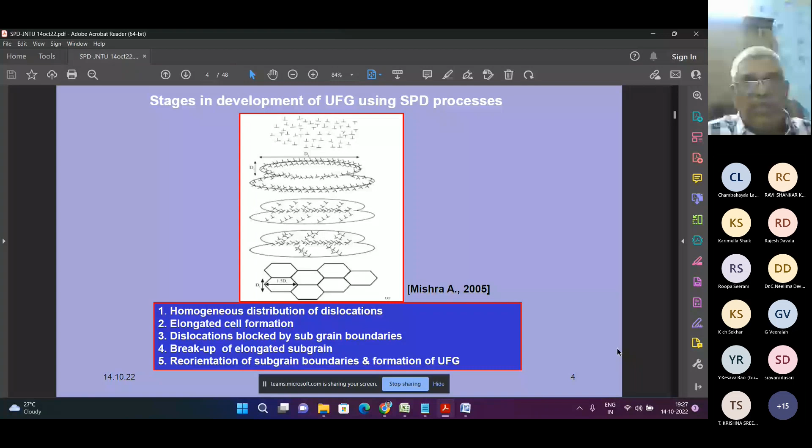Now you understand about ultrafine grain materials and how to make these ultrafine grains. What methods are available? There are two approaches: top-down and bottom-up. In top-down approach, you take a coarse columnar grain structure, roll it, forge it, or do severe plastic deformation to make nanostructured or ultrafine grain materials.

Bottom-up approach is using the powder metallurgy route or chemical vapor deposition route, where you consolidate fine particles to make an ultrafine grain structure and nanostructured materials. These are the two methods available to make ultrafine grain structures.

I think in colleges also you find a top-down approach: the director or principal takes some decision and gives it to the HODs, HODs pass it to the faculty, and faculty to the students, so that rules are made and changes happen in the system. Similarly, the bottom-up approach in colleges or institutes is where you get ideas from the bottom, that is faculty members or students, consolidate those ideas, and give them to the HOD, who passes it on to the director or principal. So that is called bottom approach. Whether top-down or bottom-up, that can be decided by you.

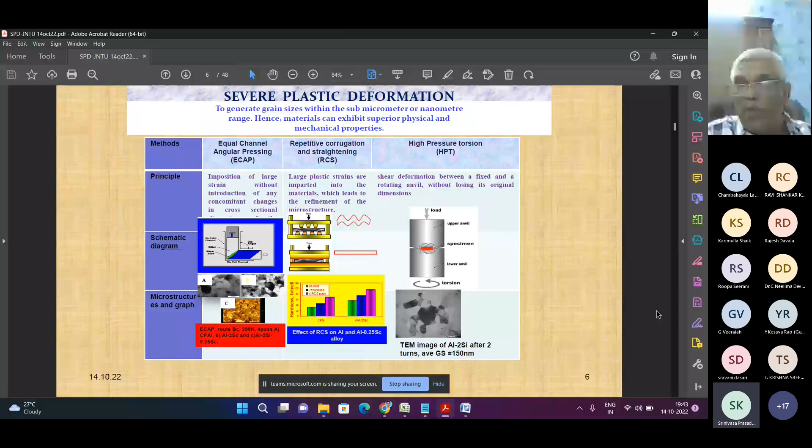So that performance will be better. What is the difference between a metallic material and a plastic material, you should know very carefully. The fracture in plastic or polymer materials like CFRP and GFRP is called catastrophic failure, meaning the failure happens suddenly without any introduction of a small crack beforehand. But in metallic materials, the crack initiates, propagates through transgranular or intergranular paths, and finally fracture takes place, which can take almost more than 6 months.

So we wanted systems like that. In aircraft systems, even though we can replace some of the material with CFRP or GFRP, metallic materials you are going to have without any hesitation. We wanted to say that you have to use metallic materials for aerospace application. Now their skin material has been replaced with CFRP. Even though a lot of research work is being carried out, metallic material research is compulsory and it is being done.

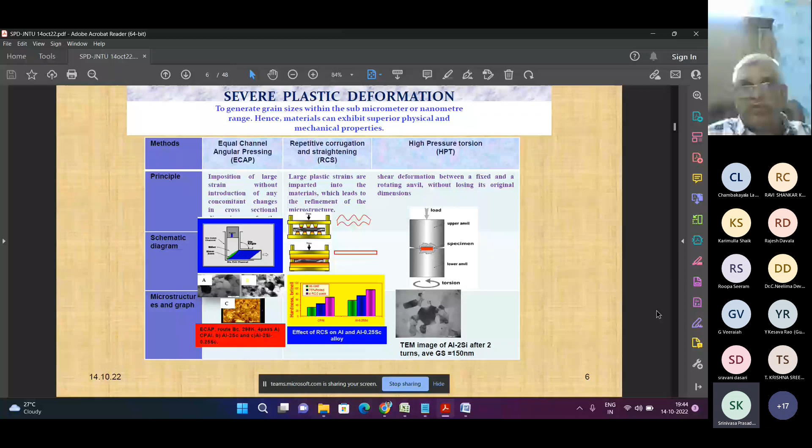Whenever we do any process, let us see what is happening. I won't explain the structural changes or how the process is made through animation; I'll directly show the work we have done. For example, we have taken aluminum-silicon alloy and subjected it to ECAP, equal channel angular pressing.

Now you can see the optical photomicrograph showing the as-cast alloy with a beautiful grain size. You have the micron bar and can easily get the grain size, and you can see how the silicon particles are distributed.

When we did this by the ECAP process, you can see an AFM image after 4 passes at room temperature. The grain size has been drastically reduced, becoming ultra-fine. The silicon particles have also broken down, as seen in the center part. There is a drastic difference between the initial stage and after one, two, three, and four passes.

Each pass, we go on changing the direction of the sample, and you get different shapes and sizes of silicon particles. This bar chart shows the reduction in silicon particle size due to the ECAP process.

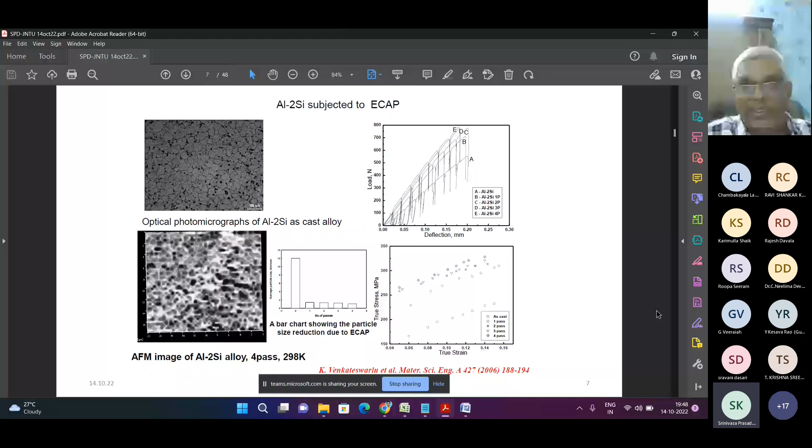Now here you can see the ECAP process we have done. Most people after PhD, when wanting to go for higher studies like a postdoc position, when I went to University of Southern California, I had taken a lot of samples. This is because I know ECAP work well, and I am involved only in severe plastic deformation work.

From NML Jamshedpur we had a lot of facility for manufacturing samples, so we made all 10 diameter by 100 samples with very good surface finish, like CPAL, commercial pure aluminum. Most people must know about these aluminum alloys: 1000 series to 9000 series are available. The 1000 series is pure aluminum.

2000 series, 3000 series, 4000 series, 5000, 6000, 7000, 8000, 9000 series. What is happening is you add some alloying elements to increase the strength of the material and ductility. The ductility may reduce, but initially you want to improve the strength.

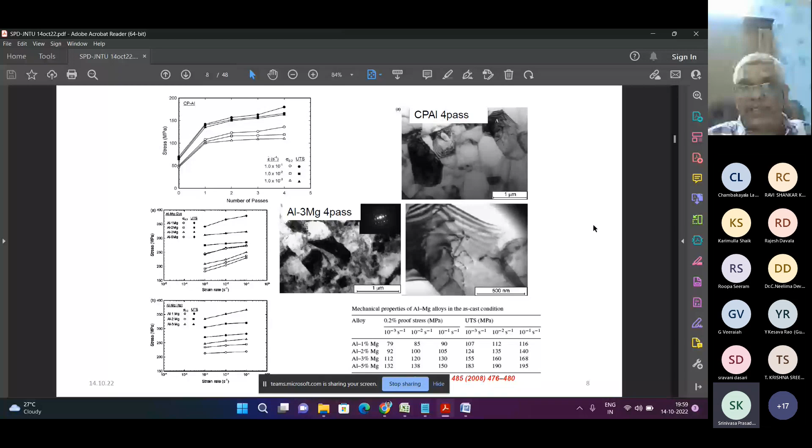This has also been published, and I have given the reference of the publication. Next slide, please. Yes, I changed it.

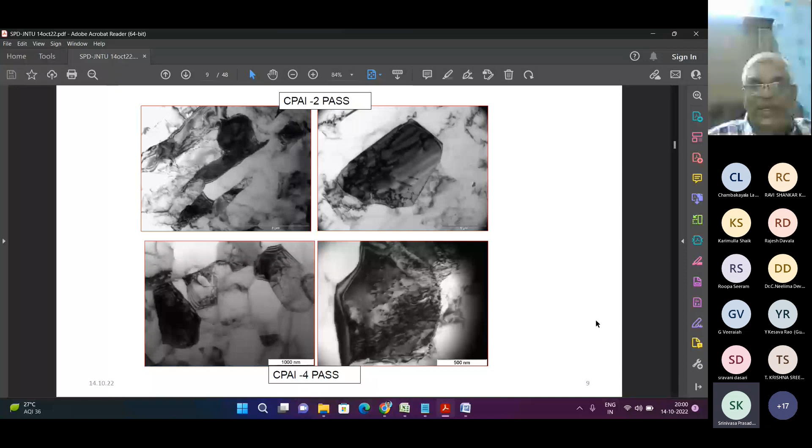This is the work we have done for TEM, and all of this work has been published.

What we have done is we tried adding scandium content. As we have seen, aluminum 2 scandium master alloy is available, where 0.25% scandium is sufficient when adding. That means for any alloy, whether aluminum-magnesium-silicon or aluminum-zinc-magnesium, 0.25% scandium is sufficient. But aluminum scandium is available only in the master alloy form of aluminum 2 scandium.

So that sample itself we have taken and tried the ECAP process, and after 4 passes we can see that the grain size is drastically reduced. At higher magnification, the grain size is still further reduced, almost to 200 nanometers. So this has drastically reduced the grain size.

Similarly, we have done this with aluminum 3 magnesium alloy after 4 passes. Generally, after 4 passes, if you go on doing a 5th or 6th pass, there is no use. In one Australian paper, they continuously did 8 passes and found that after 4 passes there is no much difference. So everybody restricts to 4 passes only.

When doing grain refinement studies, according to the Hall-Petch equation, grain size reduction influences the yield strength—the yield strength enhances as grain size reduces. Can we go on reducing the grain size like that?

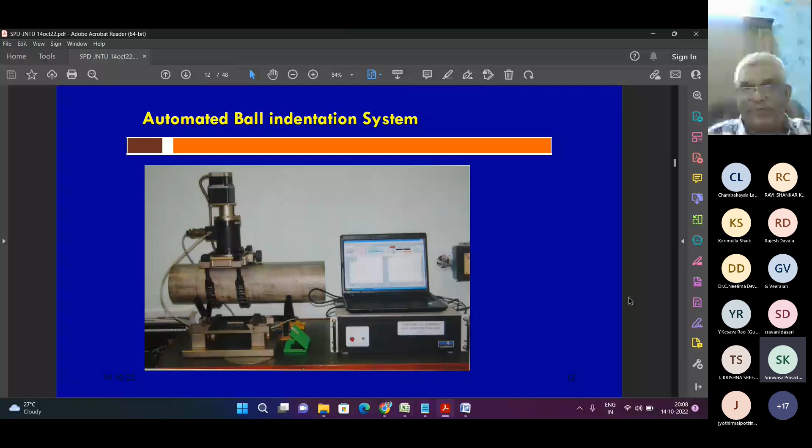Next slide, please. Yes. I don't know how many people are interested in aluminum alloys.

Before going into high pressure torsion in detail, let me explain the material requirements for CSIR NAL till 2025. Last year we went to Delhi with all aluminum manufacturers in India like Balco, Nalco, Hindalco, Malco, HAL, NAL, ISRO - everyone presented. I am happy to inform that I went for this meeting from NAL and presented. The requirement I will show is very small compared to the requirements of ISRO and other space organizations in terms of aluminum consumption, very small compared to our laboratory needs.

I'll quickly go through these slides on the material requirements for CSIR NAL. I request Dr. Prasad to go a little fast. Yes sir, this shows the material requirements for CSIR NAL, particularly on aluminum alloys.

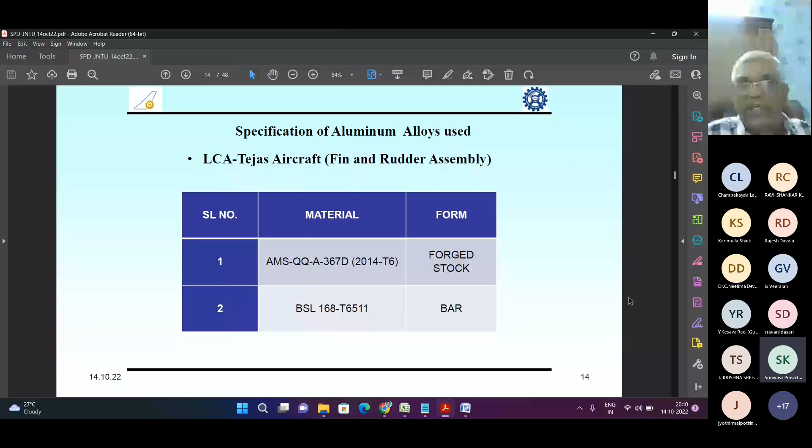Next one, yes, so this is LCA Tejas aircraft and what aluminum alloys are required. For civil aircraft systems like the Saras aircraft and RTA regional transport aircraft, what materials should we use?

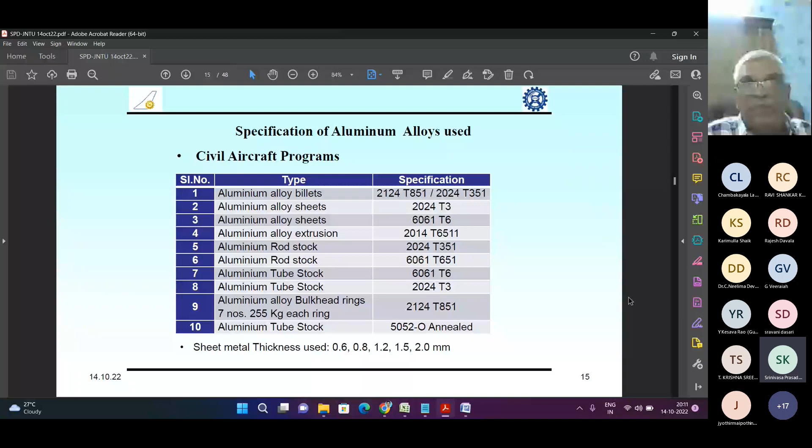2124, 2024, 6061 - you can see the T6 condition is being used on 6061. What heat treatment cycle have they given? All materials, whether in sheet form, extrusion form, rod or stock form, are given. Sheet metal thicknesses used are 0.6, 0.8, 1.2, 1.5, and 2 mm. Most people would have a record that the sheets generally used are 1.6 mm for all aluminum alloys.

This is for Tejas aircraft. What quantity is required? We have written how much is required per set - 96 kgs required, and for bars and forged stock, the requirement is also given. The total material requirement is 6.25 tons for this purpose.

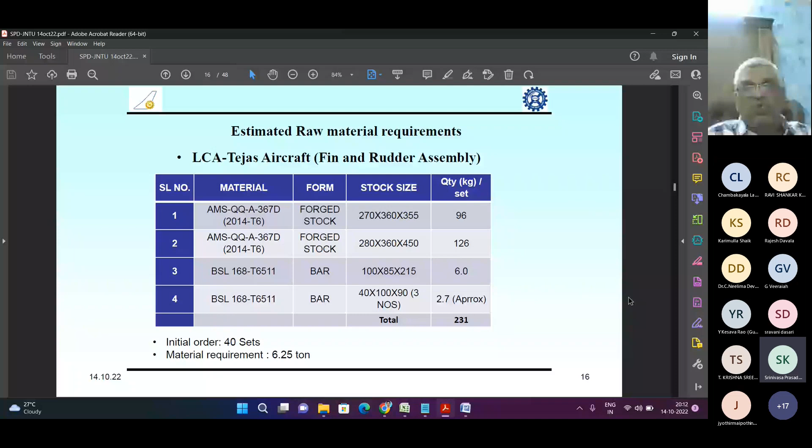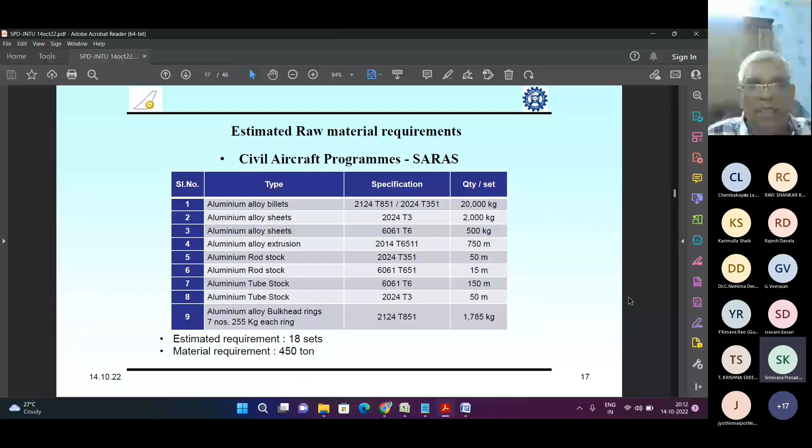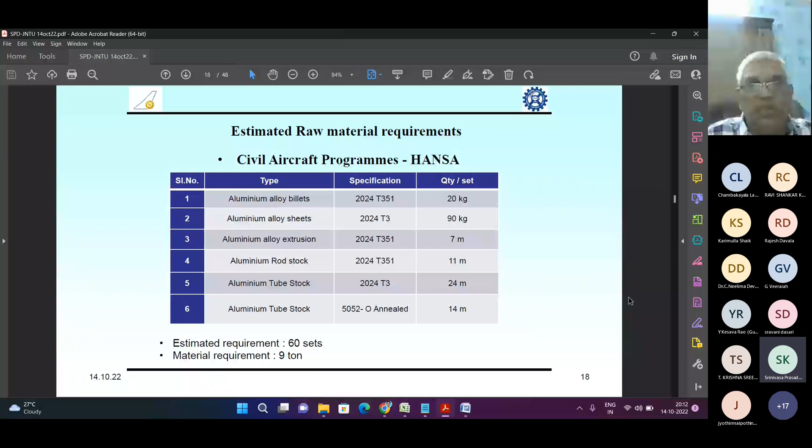For this material, about 1,785 kg material is required if you wanted to make it. Total material required till 2025 is estimated around 450 tons. The quantity we are showing here, you should not feel happy about it - for civil aircraft programs like Hansa, a new generation where aluminum quantity is getting reduced, the requirement is almost 9 tons only, including billets, sheets, and extruded products.

Then there's the CSIR-National Aerospace Laboratories with Mahindra - a 5-seater aircraft we developed, where the billet, sheets and extrusions requirement for 2025 is almost 1.1 tons only. For the RTA regional transport aircraft, a 70-seater aircraft, the material requirement is 180 tons.

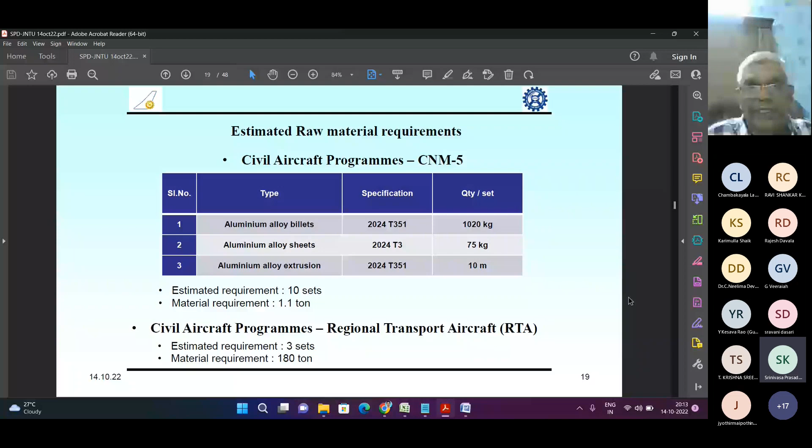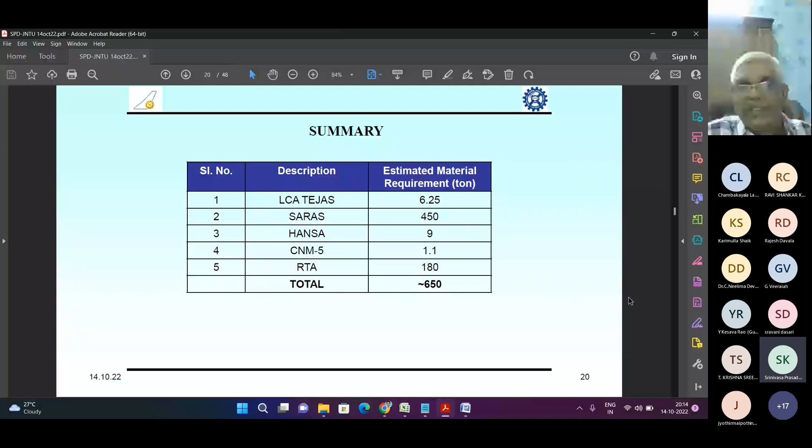Light combat aircraft is made by HAL, and we have a lot of contribution in this. This is the indigenously developed aircraft system. Nowadays, if you watch television, almost all fighter aircraft shown are Tejas. The government has given an order for making 70 such aircraft.

A break here. Sir, okay sir, we'll come back after 10 minutes on high pressure torsion on aluminum silicon and aluminum silicon scandium alloys. Sure, I think we'll stop here. Can you ask them to come after 10 minutes? Yes sir, I request all participants to come back after 10 minutes so the part 2 session will be continued by our experts, sir. Okay, thank you very much. Thank you, sir.

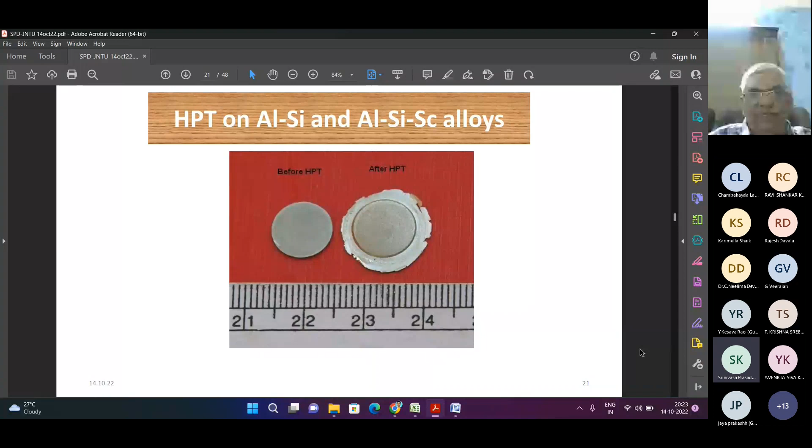Understanding this, using the HPT method you can achieve a yield strength of around 1000 MPa. Aluminum alloys, if you are getting around 350-400 MPa after heat treatment or after ECAP, that itself is great news. But getting 1000 MPa is really great news, and we got these results repeatedly.

We thought we'll present this to one of the sponsoring agencies like ARDB, because we belong to aeronautics structures, aeronautic boards. So we applied, and we showed very nicely that by using this HPT process, whatever material - aluminum silicon, aluminum magnesium, or aluminum silicon scandium alloy - we can achieve mechanical properties of 1000 MPa yield strength.

But the question asked was, when the sample is only 10 diameter and 1 thickness, where are you going to use it in aerospace? So my humble request to all faculty members is, whenever you apply for a research project, please see what the sponsoring agency is looking for. It is not about what expertise you have. We have good experience on high pressure torsion, and even though we have a lot of interesting results, when we presented this, they rejected our proposal.

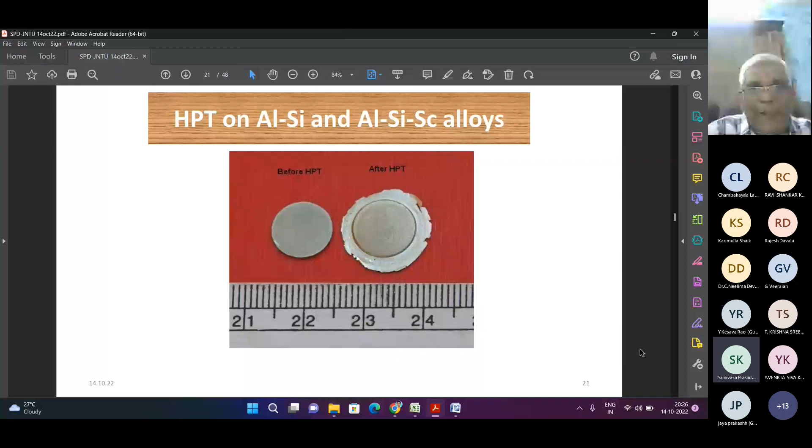Next slide, Dr. Prasad. Yes. Next slide - that is after high pressure torsion. I think this is the video, I don't know whether it can work or not. I don't know whether it is in PDF mode, it will not work. Not working, sir. It will not work, I think I cannot show, but this is the controlling panel where we are having - this is already industry, earlier one. Can you go to earlier one?

Yes sir, HPT image - you can see here that the control panel is there, where you can move the upper anvil movement, lower anvil, and make the rotation. This is a beautiful compact model we have used, based on our design. One agency manufactured this, and it is working very nicely. It is kept in Basaveswara Engineering College. Recently I had been to that place.

Why? Because whatever we have done in London, we compared the same material used here, and the results are almost coming the same. So whatever machine we have developed is extremely useful, and you can apply pressures up to 5 GPa. Only thing, the size of the sample is very, very small.

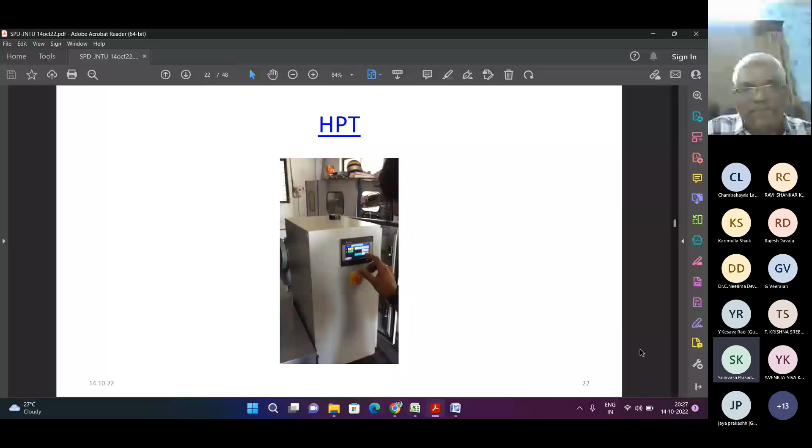So when you are doing high pressure torsion on aluminum 2 silicon 0.25 scandium alloy, in as-cast condition, you can see that the grain size is almost as in the cast condition - I am talking not the processed condition, it is as cast. It is showing around 25 to 30 microns average grain size, where due to scandium additions, refinement has also taken place. This is the actual result.

When you see this aluminum 2 silicon alloy, this is without scandium additions. With this, you can see that on the right side by using the ball indentation technique, or we have taken directly the specimen and evaluated the Vickers hardness.

I think not many people know about micro hardness. When you are talking about micro hardness, it is based on HV 0.5 or 0.2, and that subscript should be used to indicate what load you have used. What we have shown here, HV alone is not correct - it should specifically mention HV 0.5 or 0.2.

Nowadays, I am reviewing a lot of papers for international journals, and we find these types of mistakes are there. We ask the authors to rectify those things.

So what we have done is pressure torsion on both the negative and positive sides, and evaluated the mechanical properties on both sides. We did the Vickers micro hardness test with different turns - quarter turn, half turn, three-quarter turn, one turn, and five turns. As I said earlier, after 5 turns there is no further change. If you see carefully, 1 turn and 5 turns give almost the same properties, around 75 to 76 hardness values, and in the center it will be less.

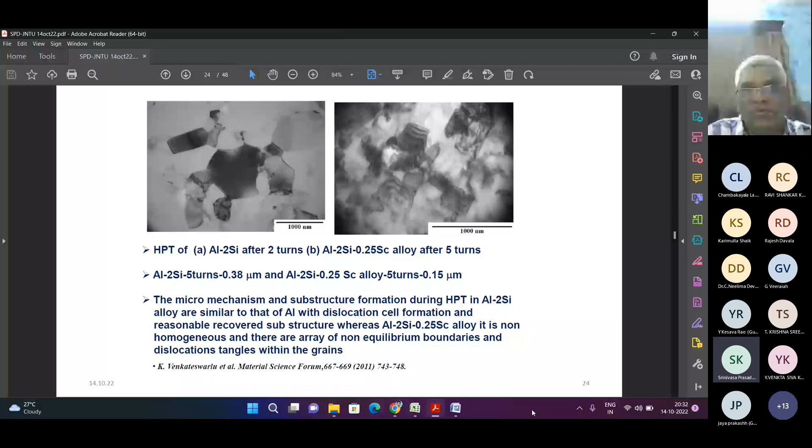Next slide. Whatever images we are showing, whatever work we have done, please try to understand that for most of these...

One minute, okay sir. Namaskar ji. Can I give a call after 9 o'clock? I'm in a lecture, okay.

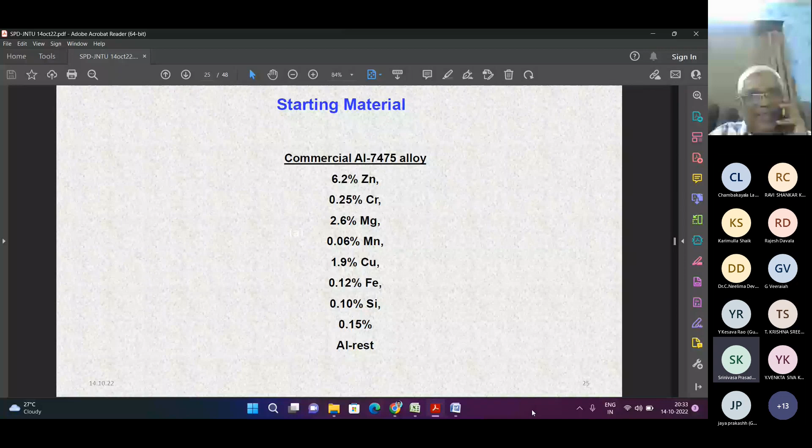So, for aerospace applications, as I mentioned earlier, there are different aluminum alloys. Here you can see 7475 alloy, the commercial aluminum-zinc-magnesium alloy used for aerospace application, with 6.2% zinc and 2.6% magnesium content.

This is the 7 series of zinc-magnesium, 0.4% means... 7475 alloy is the high strength aluminum. If you talk about the 1000 to 8000 series, the highest strength is obtained with aluminum-zinc-magnesium alloy only. Since it contains some zinc, there is some corrosion problem, but this material is still extensively used.

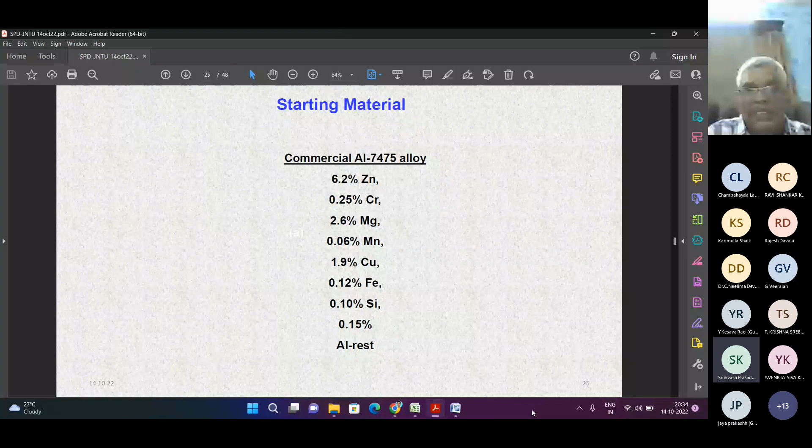Since it has some limitations, only certain applications use aluminum 7475 alloy, not everywhere. We took 7475, a high strength aluminum alloy, to understand how it compares to other alloys. If you homogenize this alloy and perform high pressure torsion, what strength properties can be improved? We studied this commercial aluminum 7475 alloy processed with high pressure torsion, and I will present the mechanical properties after HPT.

This is 7475 alloy, processed with different turns: half turn, 3/4 turn, and 2 turns. You can see four graphs, and the bottom graph is from the micro hardness tester using Vickers micro hardness, coming around 160 HV, that is Vickers hardness.

Hardness is our resistance to indentation, and all hardness values have units. For simplicity they are expressed as HV, HB, RC or RB, but the units are Newton per mm square. The Vickers hardness number VHN equals 1.854 times P by d square, where p is the load and d square is the diagonal length, d1 into d2. P by D square is Newton per mm square, that is megapascal or gigapascal. So every hardness value has units of MPa or GPa, but for simplicity we call it 210 HV, which shows the load by area.

When processed with different turns, the hardness changes from 160 to 220 HV. There is a drastic difference between center and edge. The average micro hardness versus distance from the center of aluminum 7475 processed by 2 turns is presented here, showing a drastic difference in micro hardness values.

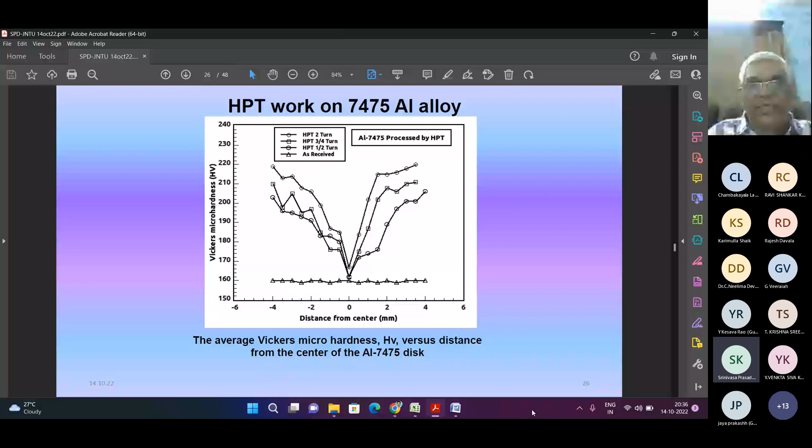We achieved more than 1000 MPa yield strength for this material, which you can never imagine getting in aluminum alloys. 1050 MPa yield strength is very, very high—even steels may not reach that much strength.

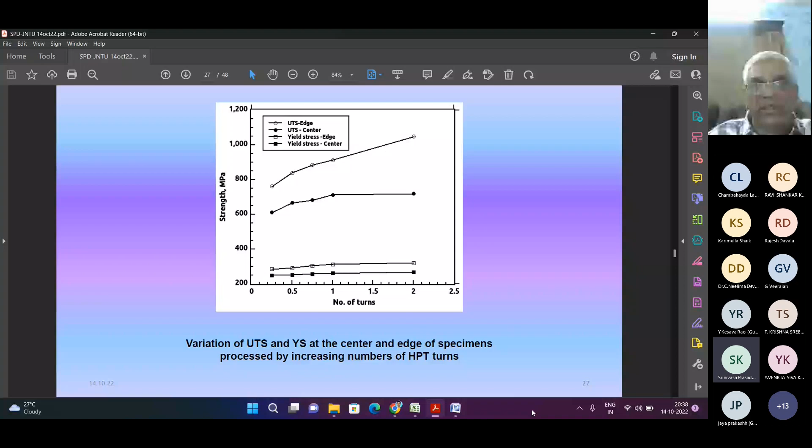This was published in the Journal of Materials Science, because one of my PhD students, Deepak Patil, who is now working as a faculty associate professor at KLE, did this work, and I am presenting all his work here.

In fact, I am the guide, and Professor Kori, who is the Vice Chancellor now in Open University, Central University in Anantapur, he is the co-guide for Dr. Deepak Patil. And we have published this work not only in the Journal of Material Science, we have published in some conferences also, abroad conferences.

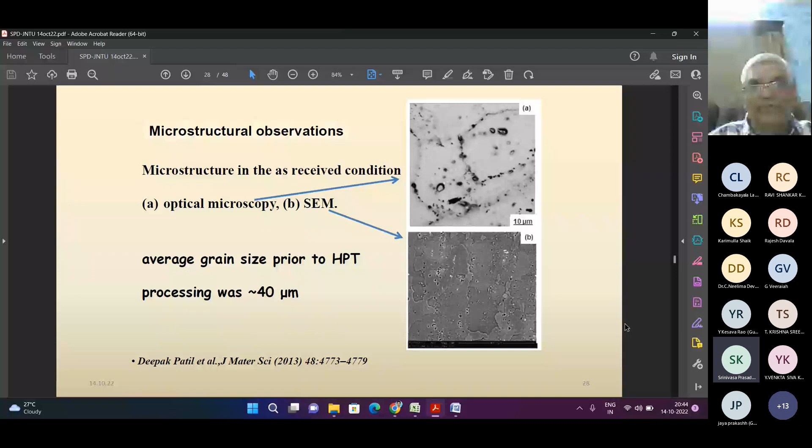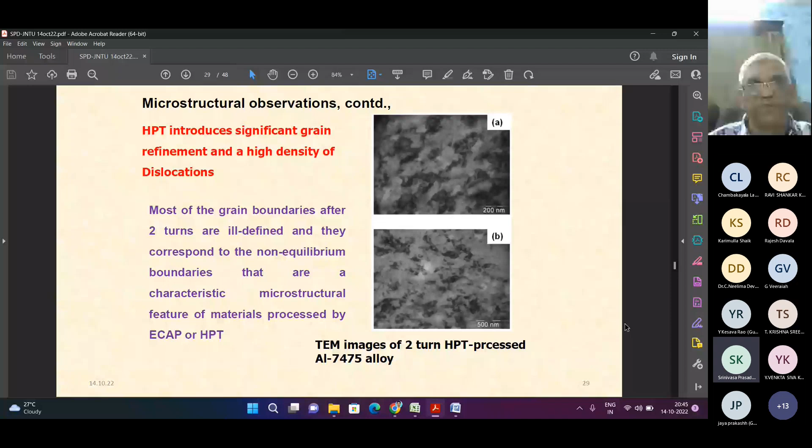What we'll do is go through the observations we have made on high pressure torsion on 7475. I wanted to give you some of the conclusions, or I will not call them conclusions, because a lot of work can still be done on this. Some of the observations we have made on high pressure torsion of aluminum 7475 is that the hardness value increases, as in the center of the sample it is very less.

At the edge of the samples or discs, the hardness is high. Why? Because you are taking only a 10 mm disc, the values remain low in the central region, and at the edges it is high. The absence of hardness homogeneity is due to the limited extent of HPT processing through a maximum of 2 turns. We have done only 2 turns here, and we wanted to see how HPT is useful for enhancing strength; we have reached 1050 MPa.

Processing by HPT through 2 turns reduces the grain size at the edge of the disc from an initial value of 40 microns. As we have seen in earlier images also, whether you take optical microscope or SEM images, in the as-received material it is almost 40 microns. After HPT of 2 turns, the average grain size has come down to 70 nanometers.

Not only do we get such a low grain size of 70 nanometers, we have also obtained an ultimate tensile strength of 1050 MPa at the edge after 2 turns. This is the work we have done on high pressure torsion of 7475.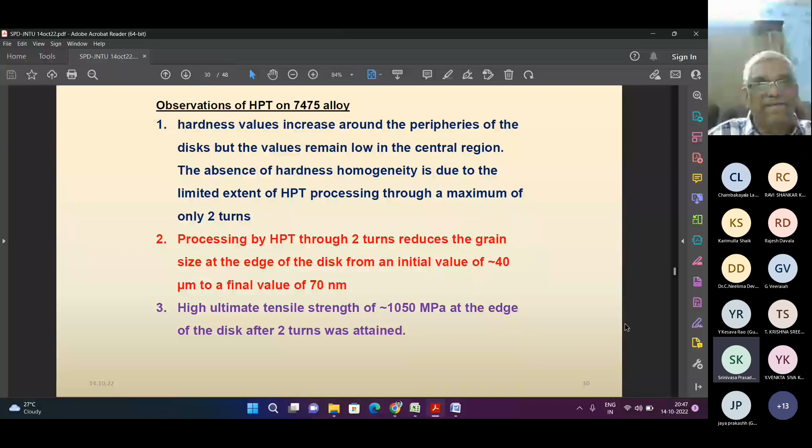I'll show you some remaining slides on high pressure torsion on aluminum 2024 alloy. Why did we choose 2024 alloy? For any aerospace application, particularly we are working on the Saras aircraft system, where the skin material and most of the stringers and engineering parts of aluminum alloy are made with aluminum 2024 alloy only. This is the aluminum-copper system, 4.5% copper, known as duralumin.

We are using 2024 or 2014 alloy extensively for our Saras applications, and we studied how high pressure torsion influences this alloy. If anybody wants 2024 alloy, they can approach us; we can send you this material free of cost. We have extensive sheet form and billets available, and we are doing extensive work on 2024 and 2014 alloy.

If you see the SEM images of this material at low and high magnification, you can see beautiful grain boundaries where Al2Cu is precipitated along the grain boundaries. Beautiful SEM images have come out in the as-received condition.

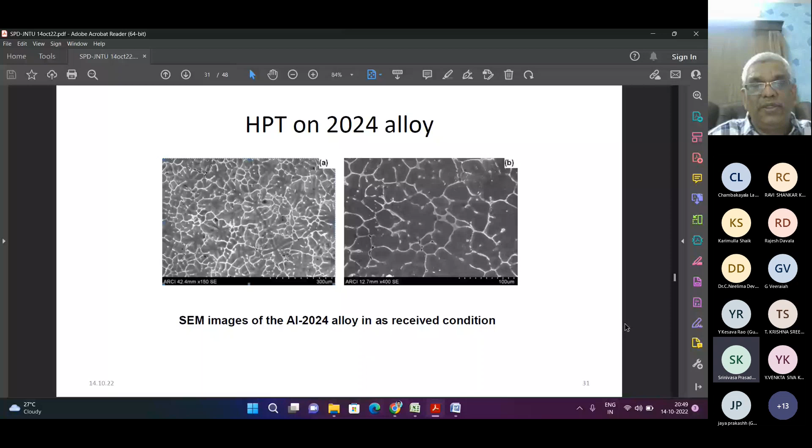Before understanding anything, you are supposed to see how grain size reduction is taking place. Similarly, this Al 2024 alloy, duralumin alloy, extensively used for aerospace application, we have used automated ball indentation, comparing center and edge for all tonnages from quarter turn to 5 turns. This is the research work we have done; you can see how YS and UTS have changed.

The UTS goes up to 1160 MPa with an n value of 0.09. As the n value increases, the values of YS decrease. At the edges, you can get a UTS of 1160 MPa. These are tremendously good results, which we have also published.

I have already explained how automated ball indentation is done for these high pressure torsion samples when the sample size is very small, and how you can do the ABI and obtain this information.

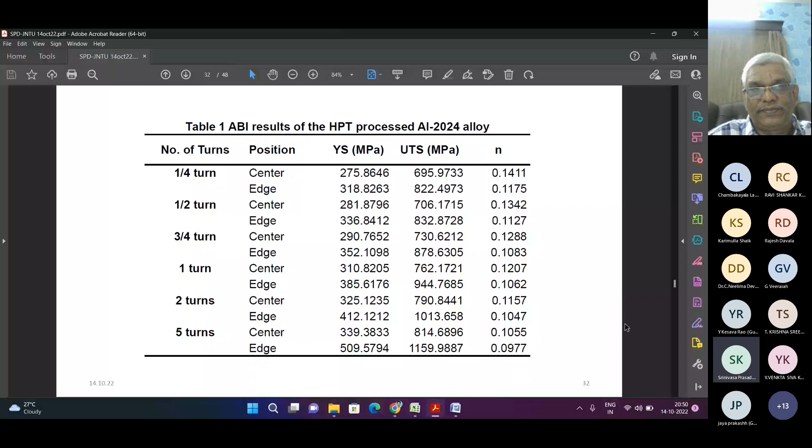That is a mechanical engineering design aspect when you are studying. You should be proud that the London Eye is developed by mechanical engineers, where you have a giant wheel, you can see the whole city of London. Till date there was no accident, and people are very happy. Why? Because the factor of safety, whatever is measured, is 1.5. For aerospace application we take more than 1.5, that is 100 MPa required, you take 175 or 200 MPa, that is a factor of safety of two for aerospace application.

If it is engineering application, 1.25 to 1.5 is the factor of safety we consider. For aerospace application in general, the factor of safety should be higher. Whenever you are designing any aircraft, the main requirement is safety of the passenger, that is most important. Then it should be economically viable, the rate should be very less, and you should have a comfortable journey. We have almost 20 divisions in our laboratory, everybody working on different aircrafts, Saras or Hansa or NM5, and we are mainly looking after the material properties only.

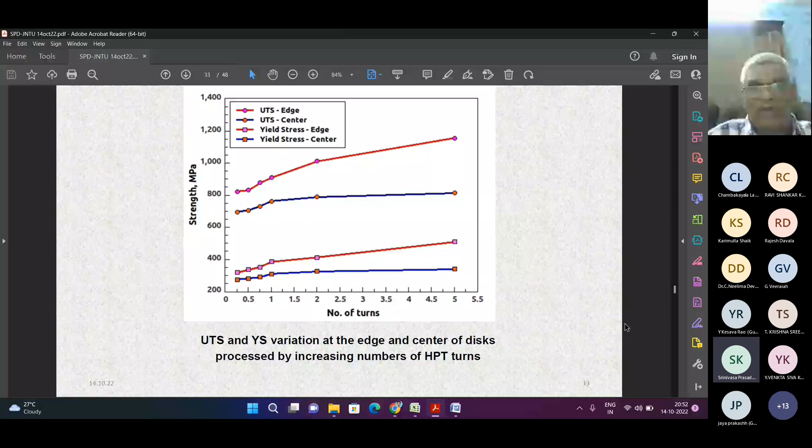After understanding this one, we are taking the TEM images of aluminum 2024 only, and you can see the dislocation type pile up on the left side image. This is after 5 turns of HPT, high pressure torsion, of the same aluminum 2024 alloy, where we got the ultimate tensile strength of 1160 MPa after 5 turns. SADP pattern also we have taken, and you can see how the atoms are arranged. You can find out the distance between each atom and the d-spacing. All these things can be measured.

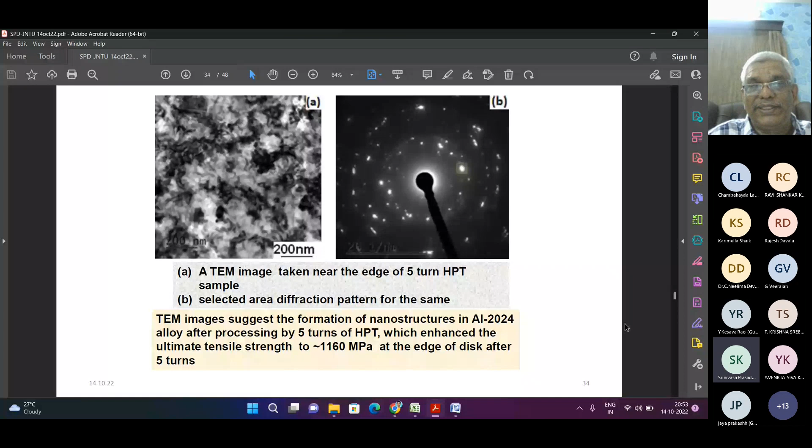I think those who have experience in TEM can easily understand that if the atoms are coming near, not like a particular crystallite size, then deformation has taken place. That's the difference in atom positions. If you go further, from the SADP pattern we can clearly say whether it is a crystalline material or a severely deformed material, you can easily tell by seeing the TEM image. Next slide, please. Yes.

I'll quickly go through RCS, because at 9 o'clock we have 7 minutes left. I'll complete this afterwards, if anybody has questions they can raise them. We have done extensive work on repetitive corrugation and straightening.

RCS method - I have given some of this work to another fellow in Hubli, because we know what is to be done. He has done extensive work on RCS. I should be thankful to Dr. Prabhakar, he is an associate professor now. Once he completed this, he got a good project also on RCS, and he is doing extremely good work. I must congratulate him for his work on RCS.

Initially, we have done it with the press. Now we have developed a unit.

Hello. Can you call after half an hour, please? I'm in a lecture, I am in a lecture.

So this work on RCS. Next slide, please. Yes.

This is the work I explained earlier also, that you can take the sample with the corrugation, and again make it straighten. We have taken different types of aluminum material, pure aluminum, aluminum 0.25% scandium alloy. We have done extensive work on this, published this paper, and calculated the hardness. As you increase the number of RCS process, the hardness is also increased.

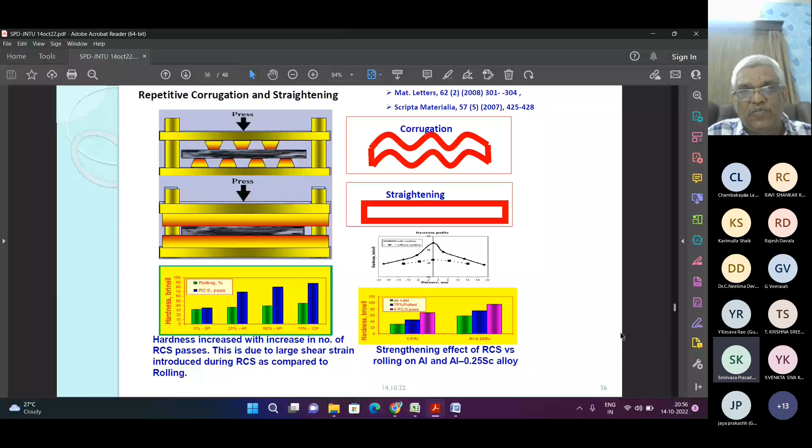This is the RCS. I would have shown a beautiful image of the HPT RCS process. This is a very useful machine where only the length of the sample should be high, whether it is 10 mm by 10 mm by 500 mm length samples. You can do 10 mm, 8 mm, 6 mm, 4 mm, any type of sample in one machine itself.

And now we have developed another machine. I think in the next slide you can see that.

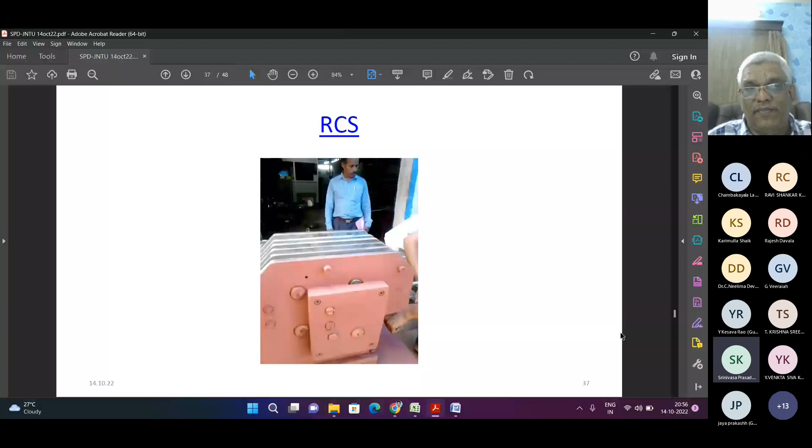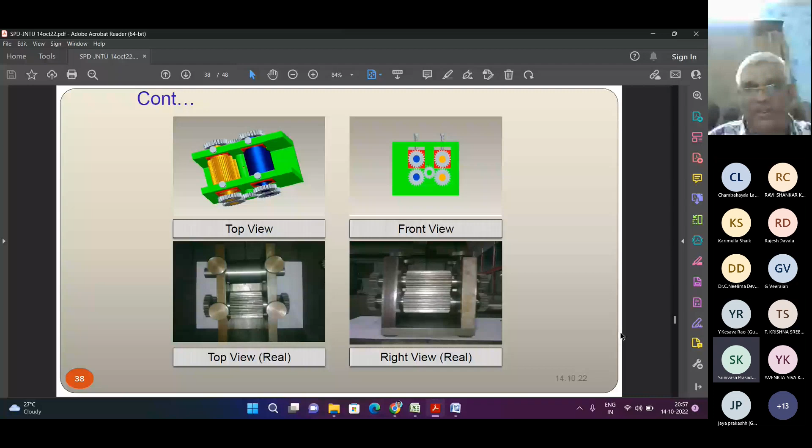This is initially what we did when we started this RCS work. It is something like sugarcane technology - we used sugarcane to see how it behaves. We put top view and front view here. We keep the sample so it will become initially a corrugation type, and after that there are plain rollers where you get the straightened samples.

This is one continuous process, and now this machine is available with us. If somebody has 8 by 8 by 120 samples, they can send it to us. We can process this one pass, two pass, three pass, four pass, very nicely, and you can evaluate the mechanical properties, and we can jointly write papers on this. Any material by 8 mm by 8 mm or 6 by 6 by 120 mm - if you have it, you can send the samples. We will do the processing and send it back. This is the continuous RCS system we have developed, now available in our laboratory.